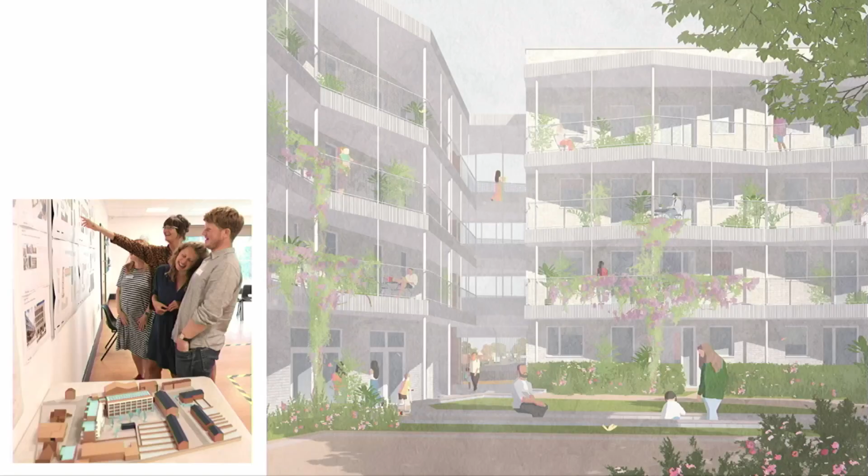We're part of a big collaborative team on a new neighbourhood in Lewes called the Phoenix, and the project Laura mentioned, this co-housing scheme in Norwich—we're just resubmitting some elevations today. I'm feeling quite emotional about this project now because it's going through a very long planning process.

Anyway, the point of showing you those pictures was that you might have noticed there's pictures of projects on all of those, but also pictures of people—the people who are our clients or those we work with or speak with.

And that's because at Archio we work really hard to lead the industry conversation on co-design and on collaboration.

Oh, look, my team have just arrived. Hi—sorry to embarrass you.

We really care about collaboration and co-design because we think that to solve really big, complex problems and make positive change, you have to understand the user experience and those issues firsthand. That's, in a sense, the essence of what we do and our approach.

Retrofit of existing housing stock is one of those really complex and vital issues. We were particularly interested to read, a couple of years ago, about the huge potential scale of retrofit in the UK's interwar housing stock—there was an article and a report by the RIBA on these topics.

We were really interested because we were already working in the Becontree estate, apparently the largest social housing estate in the world, with 29,000 homes. It covers the majority—40%—of Barking and Dagenham's households.

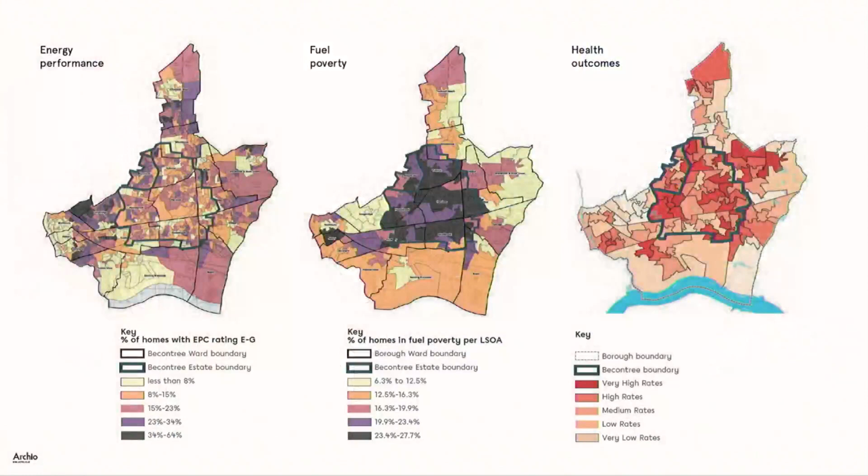It shows a correlation between low EPC rating, fuel poverty, and low health outcomes. I'm preaching to the converted here, but poor housing costs the NHS a huge amount, and damp and mould contribute to those poor health outcomes—a big issue for housing providers and housing owners.

When we started this commission to look at a retrofit strategy for this huge estate, we took a step back and thought: do we really want to bamboozle people with ideas of retrofit, heat loss, and insulation—topics we knew statistically were not familiar to them? So instead, we made 3 models of the 3 very typical house types in the estate.

So there are 14 house types, and 3 of them cover 70-ish% of all the homes. So the scale of getting a retrofit answer right and it percolating to a huge amount of homes was extraordinary.

But what we started with was talking about what's your experience of your home? Where is it overcrowded, or where do you enjoy it? Where is it damp? What's the condition of living there? So we were starting the conversation, not saying what are your heating bills and how do you want to retrofit your home? Because it's not a concept that people are necessarily thinking about every day. They're just thinking about how they experience their home.

And we also talked to the maintenance teams at length, and we found that, as predicted, common issues were damp and mold. That's because when people can't afford to heat their homes and they keep their windows closed, it's an exacerbated cycle of issues.

So I'm going to show a couple of graphs just to show you that it's not just about talking to people. There was a huge amount of technical data behind this. We have Passive House trained people in our office who undertook all this PHPP modeling.

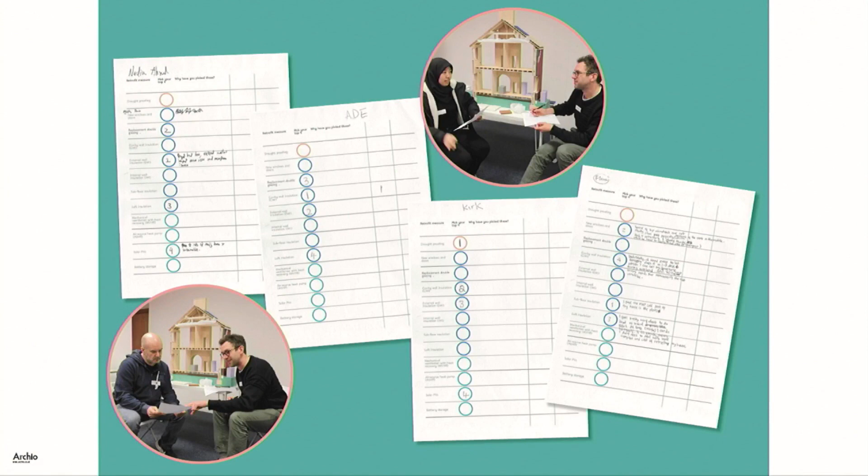And Ade, for instance, who I introduced earlier, she wants to reduce her fuel bills, but she was really obsessed with having an air source heat pump from day one. And it took us a couple of weeks to find out why, and it's because her neighbour has one. And I think that's quite telling.

I think we're kind of advocates for a groundswell of neighbourhood-led retrofit, because once you see your neighbour do something, and it's a house that's similar to yours, it's familiar - it is more likely to kick you into action than having quite general ideas on retrofit. And that's very much at the centre of what we have done here. And this is the model.

It's in the exhibition upstairs. And we wanted to make the models really beautifully so that the residents started to build trust, that we knew about their specific home, and that we had really understood what their home required.

And also it helped to talk very technically about retrofit. We have a whole series of videos describing different retrofit solutions. But even doing a slice through the house, none of the residents knew that they had air under their floorboards. No one, unless it's the kind of thing you're familiar with, would know that you could put insulation under your floorboards. It just wasn't something any of them were familiar with.

So alongside all that, we measured a number of different retrofit solutions, and the baseline energy demand of an existing home in PHPP, calibrating it with the EPC data for that house type, and we benchmarked it against all the energy usage and national average.

All I mean to say is we produced all these graphs for Be First, so they have a pure, good set of asset review information of their estate, but we absolutely did not show that to the residents because it would be totally bamboozling. So instead, we produced very simple diagrams like this that show the percentage of heat loss in different parts of your house.

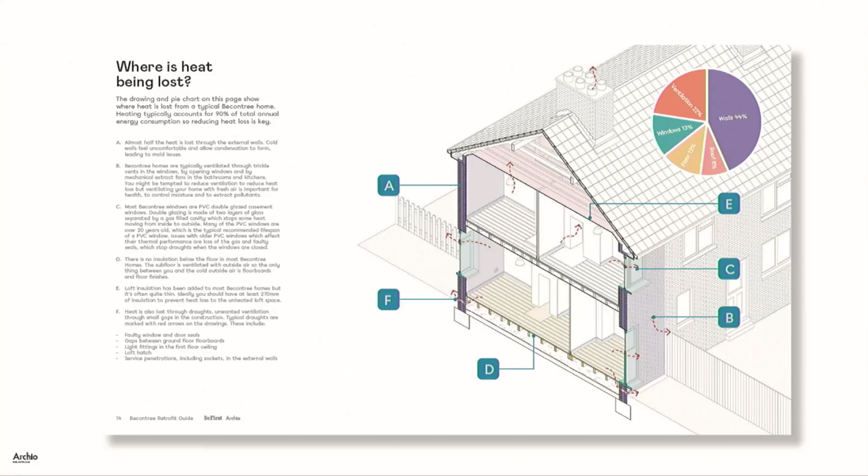And I think that really started to take them on a journey of where they could retrofit themselves. There are obviously lots of technical challenges with this because the passive house modelling assumes that residents keep their homes at a very average 20 degrees temperature, which is not the case. But we have to make our best efforts as we go.

And then topics came out, such as how do we set an appropriate energy price when we don't know what's happening with energy prices, if we're talking about payback periods, knowing that some retrofit measures have really short payback periods and some long. We did a lot of work into this, and then residents said, it's not really that we care about. We just want to know if our house is worth more if we've done the work. So in a way, they helped us define what we were measuring and targeting.

And that's now become the next piece of work - if Amandeep were here, he would tell you about it - about how we're getting more data on that so that we can fill people with confidence that it would add value to their homes. Although, frankly, that was a month ago, and now who knows.

So what we were ultimately drawing out was a pathway to a net zero home. And I think where we got to was that we needed to create a retrofit solution that enabled a net zero home, air source heat pump ready, etc. But we had to get there first with some easy wins. Nobody we met there was going to employ a retrofit coordinator and do the whole hog. We had to start with describing some easy wins and their payback and how they would be overcome.

The other thing we had one eye on is that most of the people we met were more motivated to spend money on extending their really quite small homes than on retrofitting their homes. The homes are built in the 1920s, and the kitchens are really designed for one housewife to carefully make dinner on her own. It's just not the reality of people living in their homes.

So we produced - this is a very simple drawing, but an extension and adaptation guide that is now being subsumed into Be First's design codes, planning design codes for adaptation and extension, so that we're removing another hurdle to retrofitting your home. And we're showing residents how if you do retrofit and extension at the same time, you save a percentage of the building cost of doing the two together.

And that is basically me. I don't know if I've been too short or too long, but there you go.

All I was to say is that with over 1 million homes of exactly the same interwar housing typology, I think this scale of potential impact is huge. And I also think that I've been meeting with lots of people who are working to impose retrofit on their tenants and on their neighborhoods, and they're getting a lot of refusals. They go all this way to the end of finding a solution, and lots of people don't have the trust and are not taking up this incredible offer, actually.

And so I think that understanding people's issues of trust, the hurdles towards them doing it, taking it up, is really fundamental if we're going to build this groundswell of neighborhood-led retrofit, which I think is really fundamental.

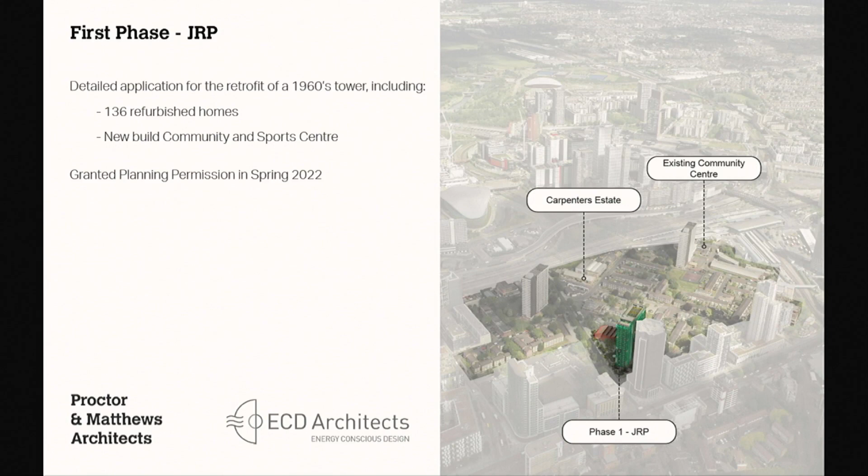So this is the first project, the first phase. This takes an existing tower within Carpenters and puts forward new refurbished homes, as well as taking an existing community centre, which is on the northern side of Carpenters over here—the Docklands facility—into a state-of-the-art community centre at the base of the building. This was granted planning permission in spring 2022, and we'll talk a little bit about that later on.

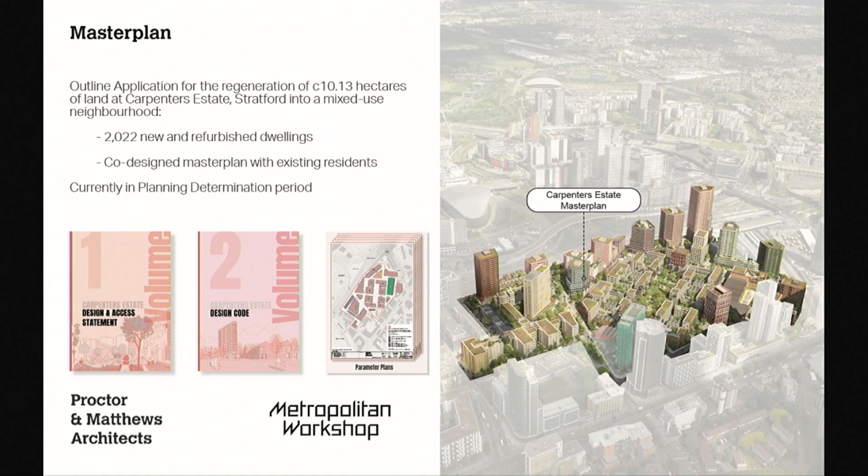And then the master plan is the wider estate regeneration, which includes up to 2,000 new and refurbished dwellings. This has been developed through a process of co-design with existing residents, and it's currently in the planning determination period. The master plan includes parameter plans setting out things like access, building massing, heights, landscape arrangements and land use, accompanied by a design code, and then a design and access statement which has an illustrative master plan accompanied with it.

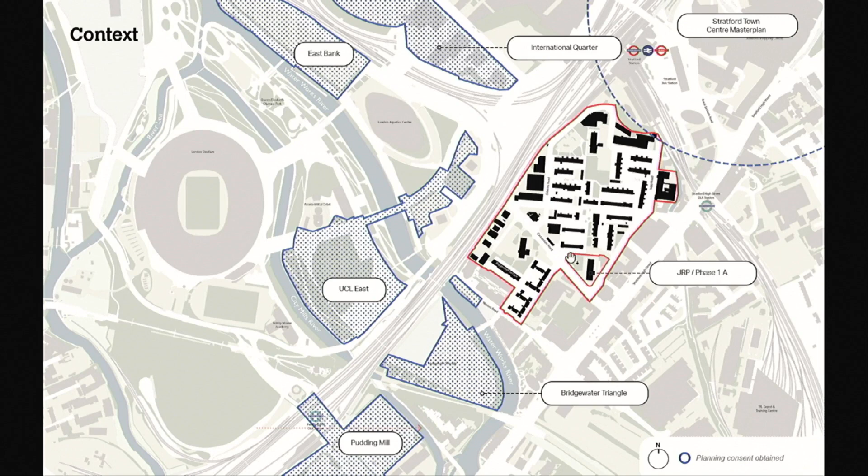So the context is really interesting. It's right next to the Olympic Park and all the amazing developments happening within the area. There's a new Stratford train station entrance going into the northern side of Carpenters Estate, which is going to completely change the way people use and visit the estate—particularly how people get to the new developments happening within the south of Carpenters. You can see JRP nestled within the centre here.

There's a series of workplaces and business units that occupy the western side of the site, adjacent to the railway. The Carpenters Dockland Centre, which is the community centre I talked about earlier, going at the base of the first phase, a building crafts college, and also a school as well. So really it's got everything alongside.

Also, have I just lost the mic? No.

I'll keep on going. Hopefully you can.

So really, with that mix of uses, it's got absolutely everything that makes it a kind of 15-minute neighbourhood. So it's a really key piece of cityscape.

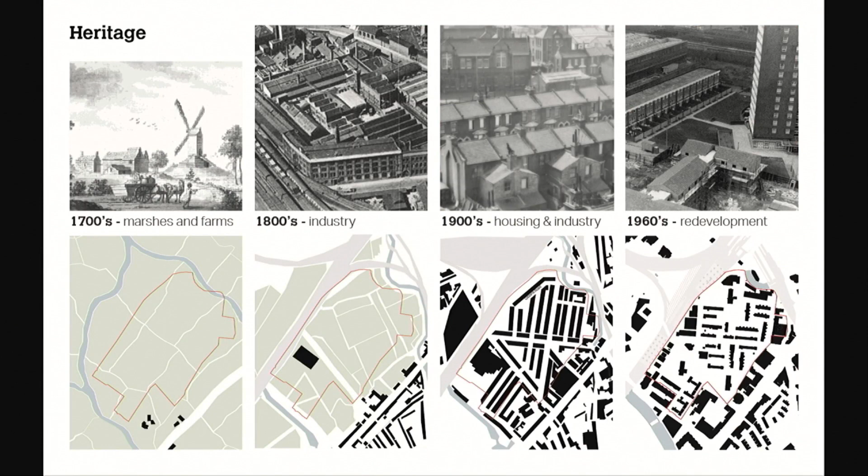It's got a really interesting heritage from being marshland back in the 1700s, going through a period of industry in the 1800s, to then a mix of industry and housing in the 1900s, which became quite overpolluted, and led to the estate redevelopment in the 1960s. This has been used to inform the development of the master plan going forward, particularly the way we've thought about the movement strategy.

What's really interesting about Carpenters is the sense of community that's been on the estate all this time. Through this process of the master plan, we've worked with residents to understand what works with their estate. It's been really interesting talking to people, going through history archiving and things like that. We've met people that have lived on the estate for a very long time, who actually remember the estate before the 1960s redevelopment.

They remember how this new estate came along and really transformed their lives, so people could live within state-of-the-art apartments, within new parkland and areas of amenity. So this made a real community, which has slowly been lost over the years.

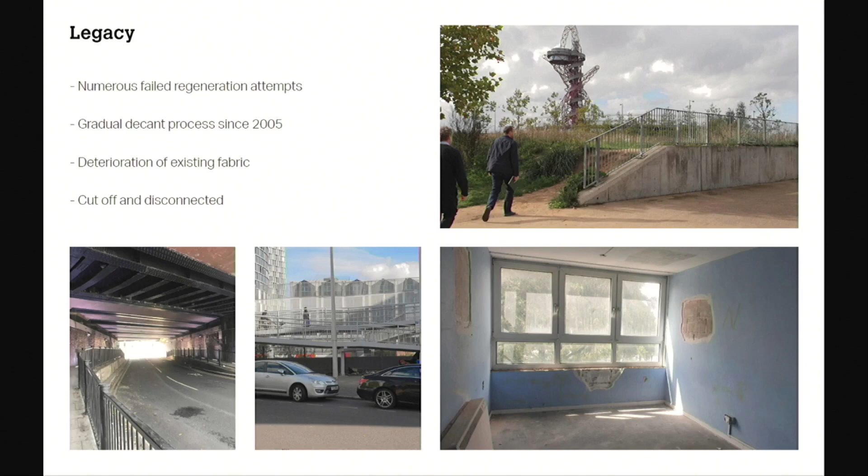Since 2000, there have been a number of development attempts, which looked at completely clearing the estate with the existing infrastructure and replacing it with new uses and new residents. Although none of these development attempts succeeded, there's been a gradual process of decant since 2005, which has led to the deterioration of the existing fabric.

And so, while the estate is so close to the Olympic Park and that legacy, none of that has been given onto Carpenters, so it's been quite cut off and disconnected.

But in 2018, a new direction was established, one which very much put residents first to inform the future of their estate. So in 2019, we started this process of engaging the residents, which led to a resident brief. Part of this process looked at various different levels of intervention.

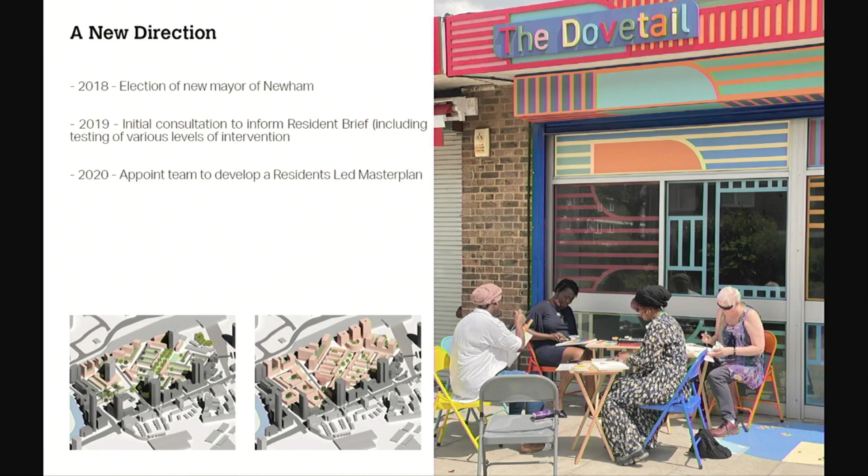The images on the bottom left are conversations, or drawings, that we used with the residents to discuss what sort of intervention they wanted on the estate, whether it was a low-rise solution or more of a mid-rise solution, which could actually provide more amenity space, more uses, more grassland, more parkland, and all that sort of thing.

So this led to the resident brief, and then from 2020 the master plan team was appointed, which led to the project that we've been working on over the last few years.

We've done a lot of our engagement from the Dovetail, which is an on-site engagement hub. This has really set the creative engagement process, using model making, interactive workshops, gathering ideas, gaining consensus, and understanding the parameters of the estate. It's been a very gradual process over time, but eventually we've gained trust with the residents.

In 2021, residents voted in favour of the ballot, which gave us the consensus to develop the master plan, and we submitted that in the summer of last year.

So in contrast to all the other developments that came before this work, we really wanted to work with what's there. This goes back to the historic maps we talked about before, looking at the legacy of movement, looking at those historic routes, and overlapping and interweaving the new movement patterns that would come as a result of the station on the northern side of Carpenters.

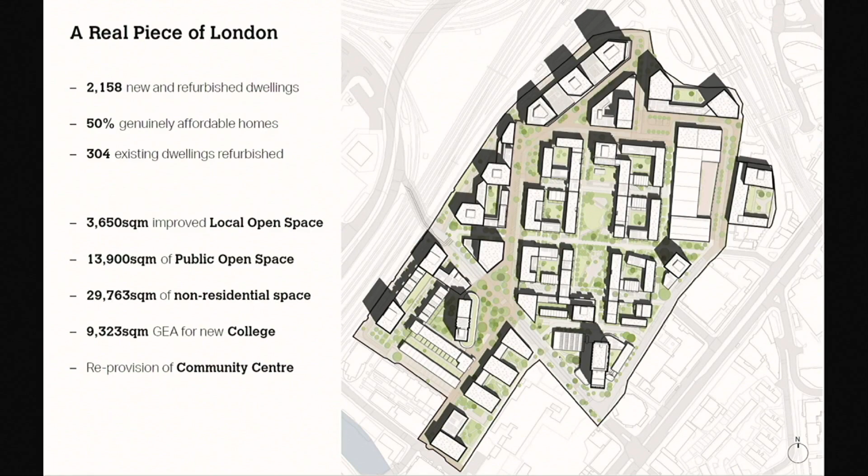And then also thinking about the existing green spaces, so expanding the existing public spaces at the centre of the scheme and thinking about how we can keep the biodiversity, keep those spaces so it gives a memory of place. And so what we've really tried to work hard to achieve is this real piece of London. In total we've got around 2,200 new and refurbished homes, of which 50% are genuinely affordable. 304 of those are existing dwellings that have been refurbished. And then alongside that, it's got all the local open space requirements, public open space, and the mix of non-residential employment, education, and community spaces that bring together that real piece of London.

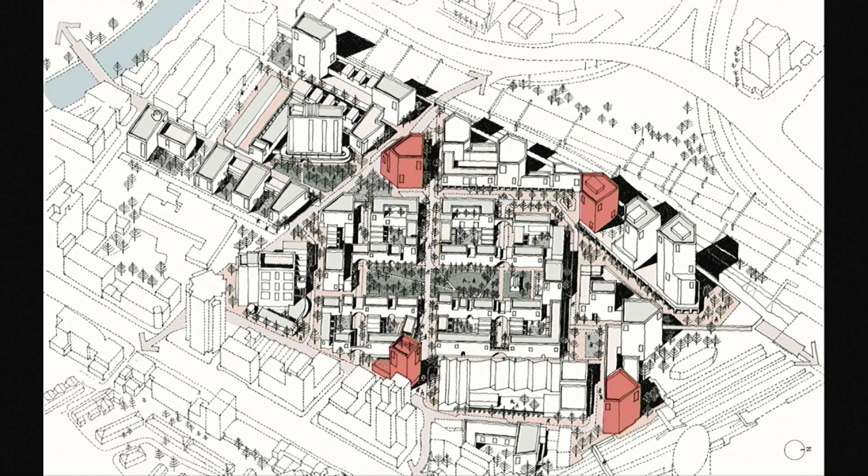And this diagram starts to pick up on those key movement routes as well. So that key route from the new Stratford train station entrance through the estate along a mixed-use high street, taking people down to the south and back over towards the Olympic Park as well.

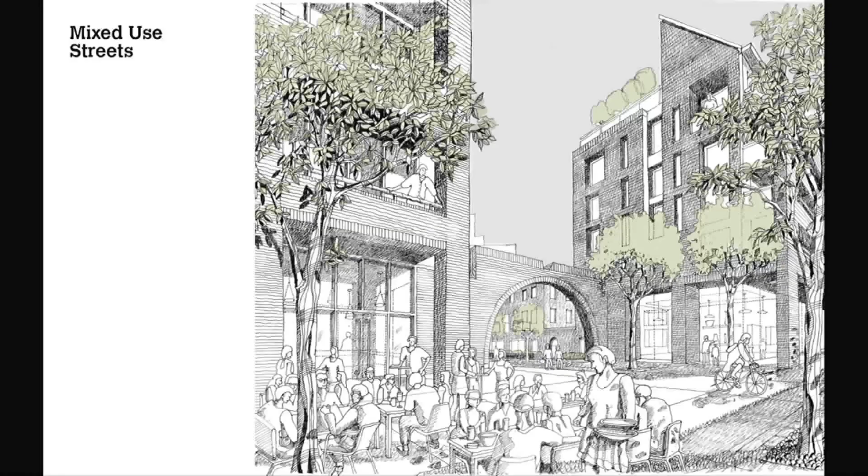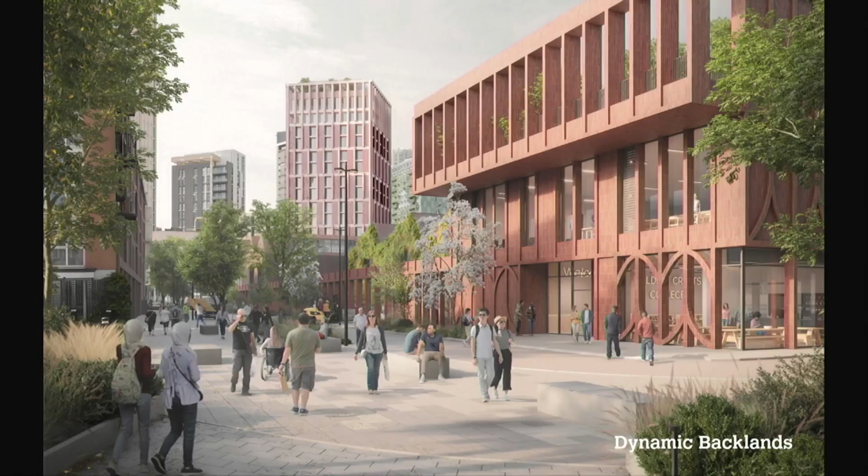We have mixed-use streets, so bringing all those other uses that we talked about in Carpenters before, and making sure that they're rehabilitated in new settings along with the high street. We've got dynamic backlands, so going back to all the creativity and making that Carpenters is, that reflects the heritage of Carpenters, and putting them in new structures that you can see the activity and the interest that happen within these new facilities.

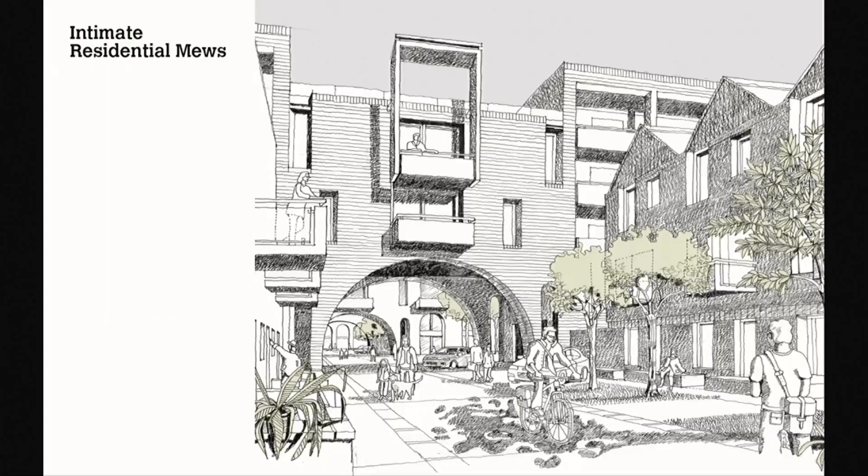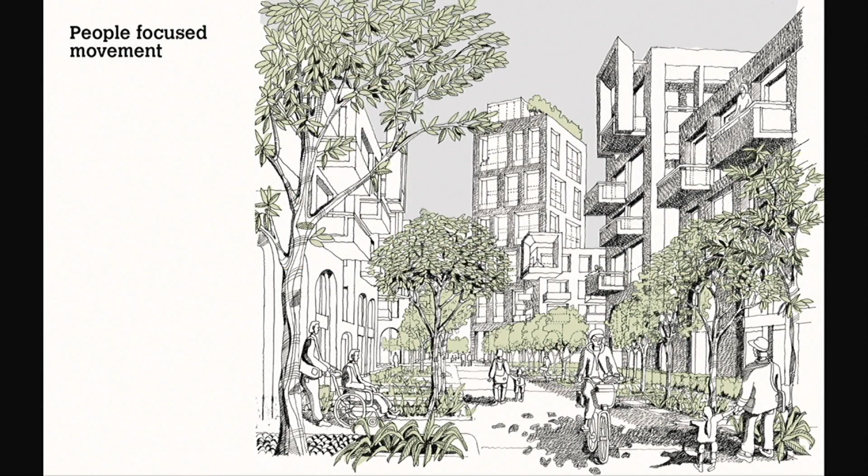We've got intimate residential mews where there's family housing, and then more active urban squares, again with commercial and community uses spilling out and occupying the space. And then a people-focused movement strategy, really working with those historic routes and spaces and thinking about how we can create a people-focused environment that promotes cycling and walking.

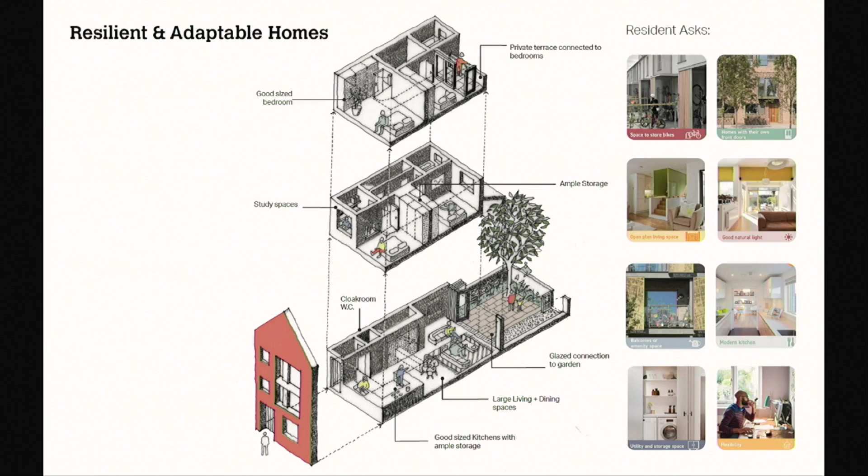So we've got things like delivery hubs that are located in certain locations, so it limits site traffic around the estate. And also thinking about how we have resilient and adaptable homes, and picking up on some of the key things that residents have asked for, such as being able to identify your own front door and the storage facilities that we've got as well, and flexible living arrangements to suit study spaces and things like that.

And how this all comes together over a period of time. So starting with the underused sites, such as phase 1, which is the existing building, and phase 2, which again encompasses an existing building, and how this then frees up other parts of the development area for higher density housing to suit a range of different needs.

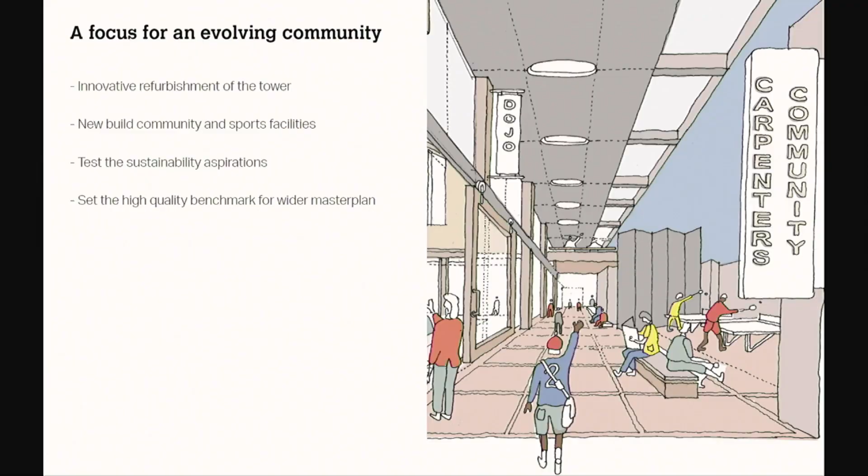That's a whistle-stop tour of the estate. I'd like to talk about the first phase, which is the existing building retrofit. This effectively becomes a focus for an evolving community, providing community facilities that will kickstart the Carpenters community while also delivering early housing. It sets a benchmark for the wider master plan to unfold, establishing that high quality aspiration. The idea of doing it as a planning application ahead of the master plan is so it can come forward and we can start on site as soon as possible.

The existing tower is a 1960s 23-storey tower. As I said before, it's built in the style of Corbusier, but it doesn't have any of the modelling or interest of its unité inspiration. It's raised off the ground on giant concrete pilotis, but the result is quite blank and underwhelming frontages that surround the streets.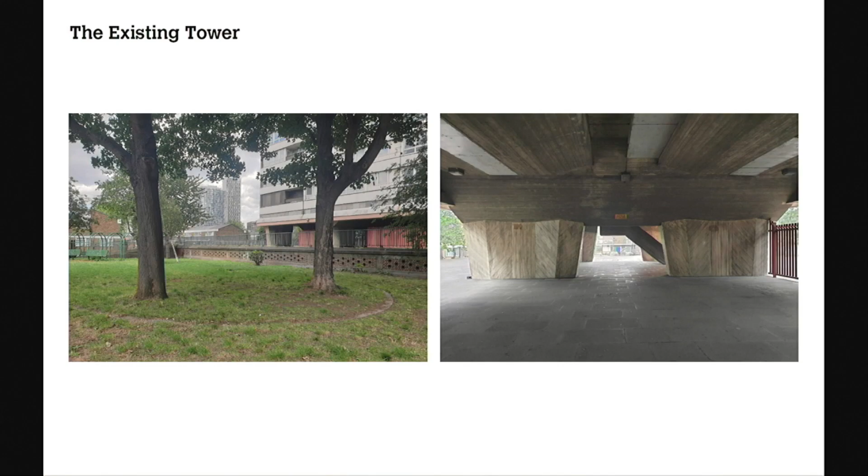As I said, it sits within its own parkland, and we've got some Category A trees that we're retaining as part of the proposals. These are some photos showing the building sitting within this green parkland, which is very underused and underwhelming. This is one of the photos from the undercroft, showing that amazing concrete soffit with the pilotis coming down. That's the entrance into the building, and it's quite oppressive and not particularly welcoming - it could really be improved and rethought through.

There are a number of reasons why we looked at keeping this building. Firstly, the environmental benefits - ECD architects would explain this better than I can, but effectively by keeping this building it allows a 75% reduction in embodied carbon over a new build, so there are lots of environmental benefits there. We can also improve the thermal performance by taking it up to passive house standards, adding new insulation onto the facade, and there are new and enhanced biodiversity benefits we can achieve as part of the proposals.

There's also a social significance here, which comes from speaking to residents around the estate and understanding their fondness for these towers from when they were first built. One of the key design ambitions for taking this project forward is to treat the building as a heritage asset so that it reflects the values of 20th century modernism. This is something we spoke to residents about through archiving sessions, where we talked about the aspirations of these buildings - they had active groundscape, interesting modelling, and you could see your house from the ground. That was one of the key things that drove the design forward.

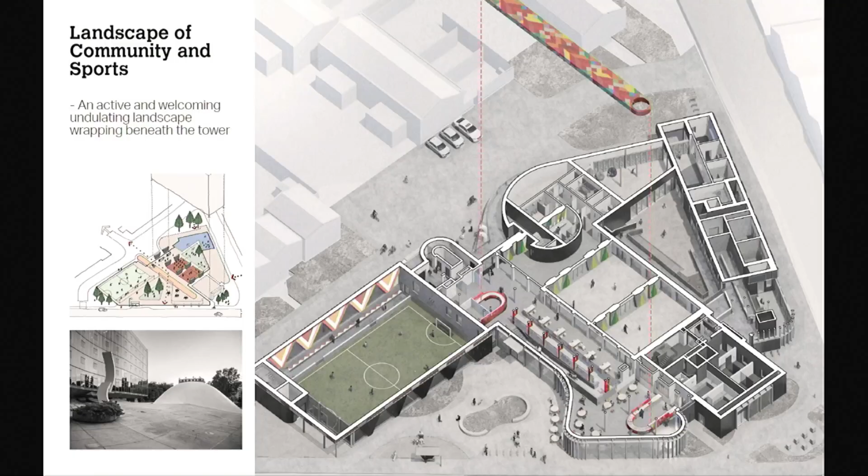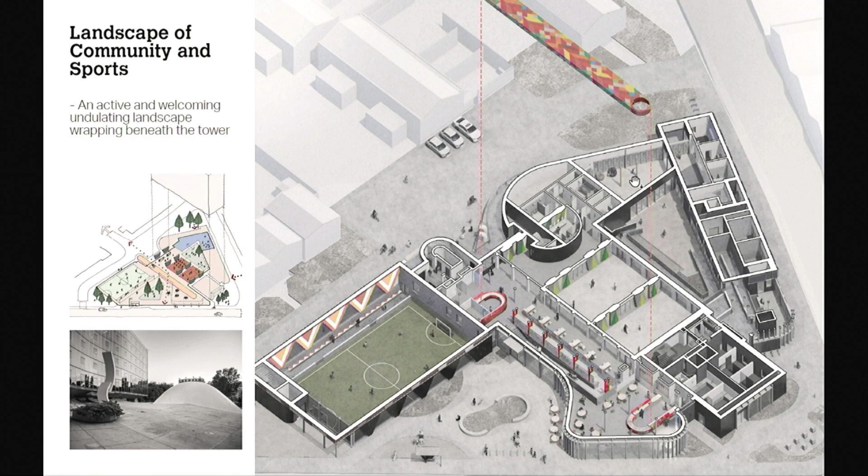So what we came up with is this landscape of community and sports spaces, giving us an undulating floor plate with a series of community spaces while still allowing transparency through the building. Putting all these new community spaces at the ground really activates the surrounding streetscape. You've got a sunken futsal pitch which people can look down into from the surrounding square, a cafe that spills out onto the street, ramps and circulation taking people up to the upper ground floor level using the undercroft of the existing building for flexible studio spaces, and a courtyard space on the other side providing a sheltered enclosure for an after-school club. So there are lots of different facilities that make this ground floor really interesting and active.

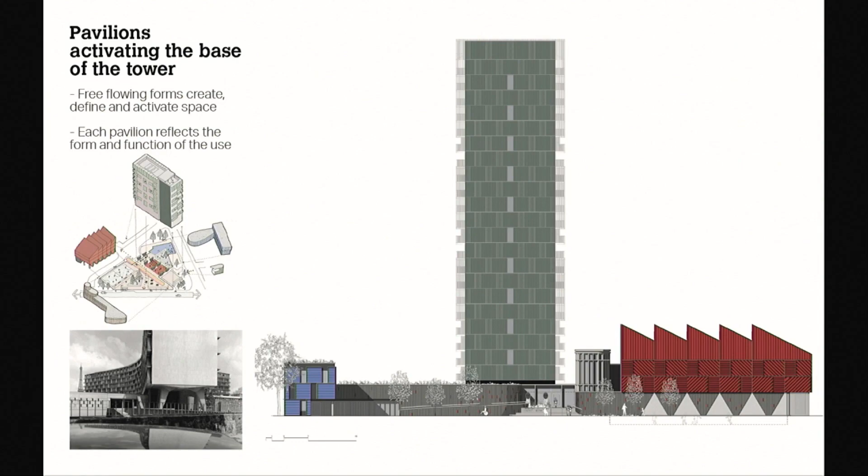This idea translates into the third dimension as well. What we have here is a series of pavilions that sit at the base of the tower, and each one has a slightly different form and shape that reflects the form and function of its use - again relating back to that idea of 20th century modernism. Each one is coloured in a way that identifies the different programmes of the building: red for sports and community uses, green for residential, and blue for after-school club and office uses.

All this leads to a contextual but vibrant colour palette, reflecting the diversity and colour within Carpenters. This draws inspiration from the Bow Porcelain Factory, an 18th century factory that used to occupy, or was nearby, the Carpenters estate. We're also thinking about using ceramics, partly as a link back to that Bow Porcelain pottery, but also because ceramics have a more domestic and human quality than other materials like metals. Again using colour to identify - this picks up on some of those Bow Porcelain fragments, using reds, blues and greens that relate back to the contextual Bow Porcelain.

In terms of the tower, there's a simple framing of balconies that goes up the facade, giving it a new proportion, depth and modelling. The idea of framing these balconies goes back to one of the points we talked about with residents before, about being able to identify your home - so by sitting within the surrounding landscape and looking up, you can see your home that's framed and given a new expression.

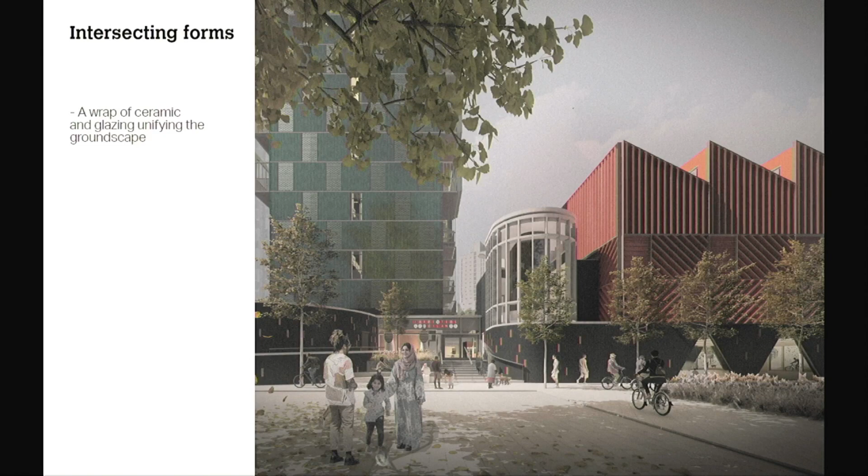There's a series of intersecting forms - a wrap of dark grey ceramic that folds into glazing and then into transparent areas, so you can see the activities that happen beyond into the community centre. The different forms of the sports hall and circulation towers all help break down what's quite a large programme of activities into a smaller scale, more readable composition.

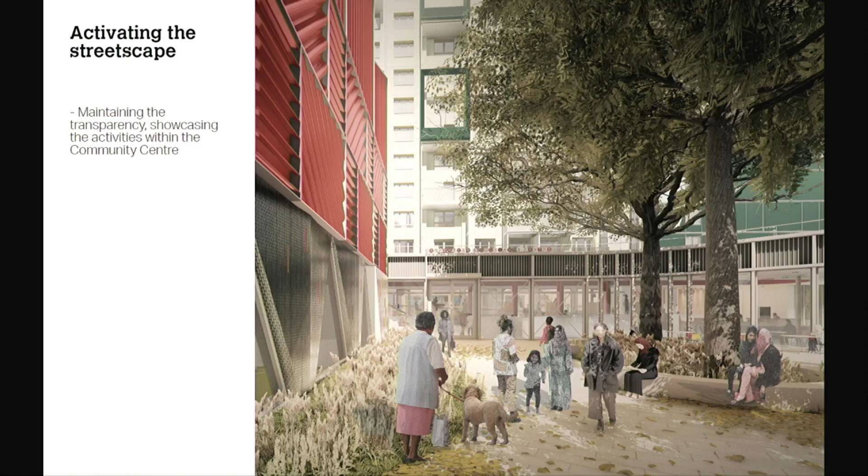It's all very transparent, so we're maintaining that transparency so you can see through the activities that happen within the community centre into the external spaces.

I suppose it demonstrates how there are lots of these typologies all across London, many with similarities where there's blank undercrofts and not a particularly engaging way of sitting within the landscape. So these new community pavilions can really help activate and engage the surrounding streets. So I think that's it, and we'll leave questions to later.

Hi, I'm Linda Thiel with White Architecture. Gareth at Civic Engineers, so we'll double up, see if we can make this work. You can have the lecture and I'll just stay here.

We've worked together since 2018 on the Gascoigne estate for Be First, and given all of our experience during those 5 years, we had a conversation this time last summer. Currently we've delivered 1,200 new build homes across the estate. We really need to assess what the later phases are going to be. There have been various conversations with design teams and Be First about what to do with the rest of the West, how do we progress on all these different sites. So we basically decided we're going to do this on our own - it's not commissioned by Be First, it's more our research, almost presented as a provocation to them, saying why don't you think about it this way for your final phases.

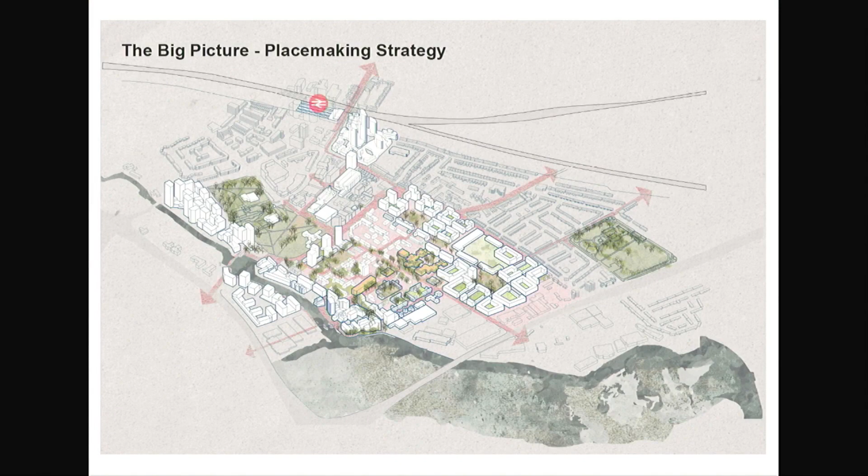We're in Barking on Gascoigne Estate. Barking station is up here. This is Gascoigne East, this is Gascoigne West - very similar to Carpenters, used to be terraced houses, very poor, so that was all demolished in the 60s, and it became a nice new 60s estate.

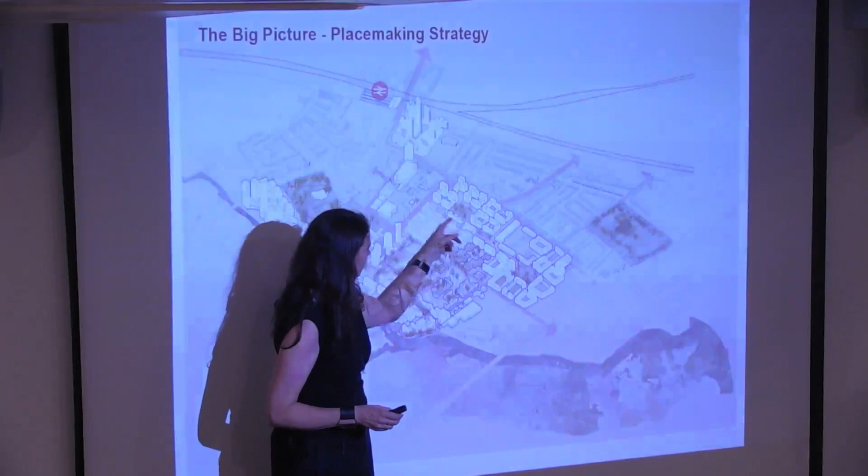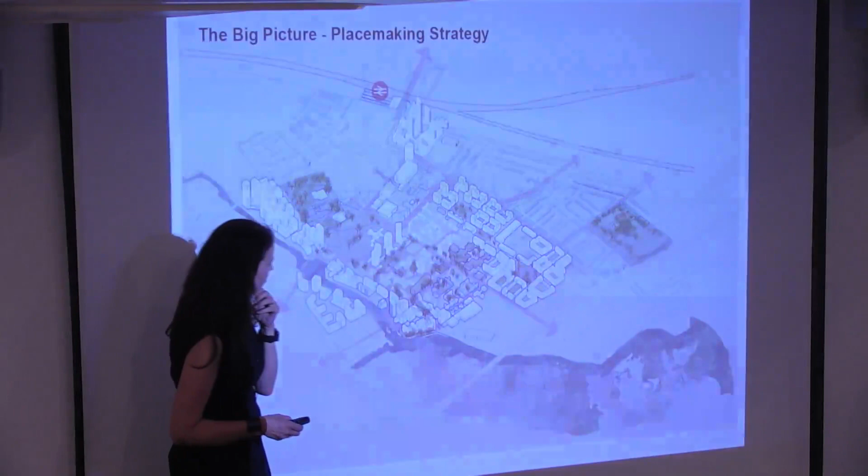The first phase we worked on together was Gascoigne East Phase 2. East Phase 1 had already been delivered by Levitt Bernstein for L&Q, I think, before Be First was established. This is about 550 units. Henley Halebrown have been involved, and Fisher Cheng has been involved with the community centre as well. Then we were commissioned to do - trying to figure out where we are - West Phase 1, which is down here, which was 3 existing low-rise, 3-story buildings with around 50 homes, and we delivered 200 homes on that site.

During that time, the Be First team realized we need to have an overall strategy for what happens on this estate. We've got 3 major schools - we've got Greatfields School, secondary, and we've got 2 primary schools here.

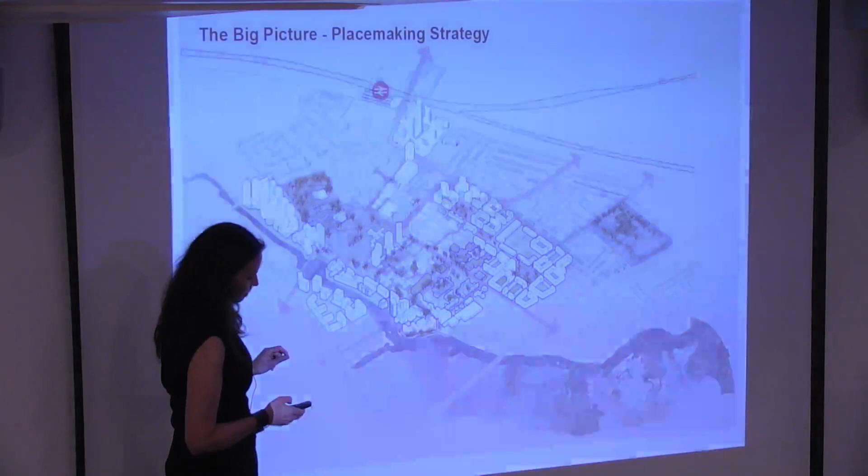Lots of pupils and families moving across this estate daily, and with all the construction sites going on, it was also very poorly connected east to west. So we tried to really work with the placemaking strategy, finding easy wins in terms of legibility, wayfinding, safer streets, pedestrian-focused and cyclist-focused. During this time, we had in-depth conversations with many community groups and residents, trying to understand their life on the estate.

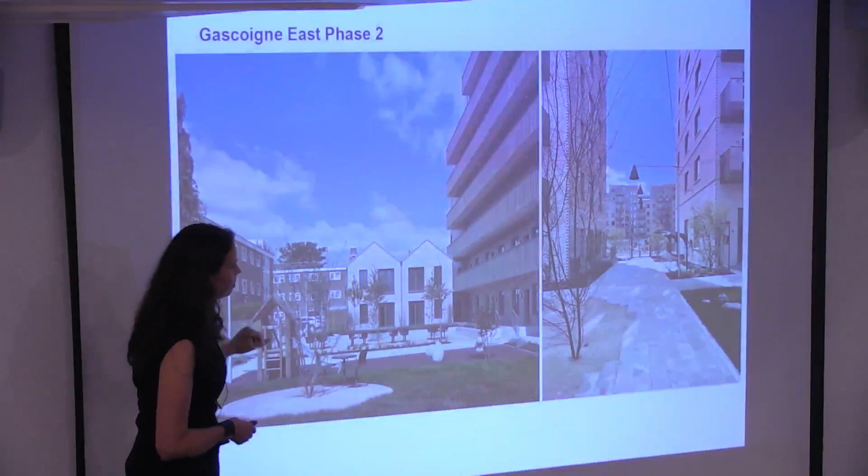This is East Phase 2, so here you do see how the new buildings actually relate to some of the 3-story existing buildings. This is part of the bit which is not yet master planned and might actually stay like this - that's a courtyard image from East Phase 2. And this is West Phase 1, which also relates to the 3-story houses and apartment blocks.

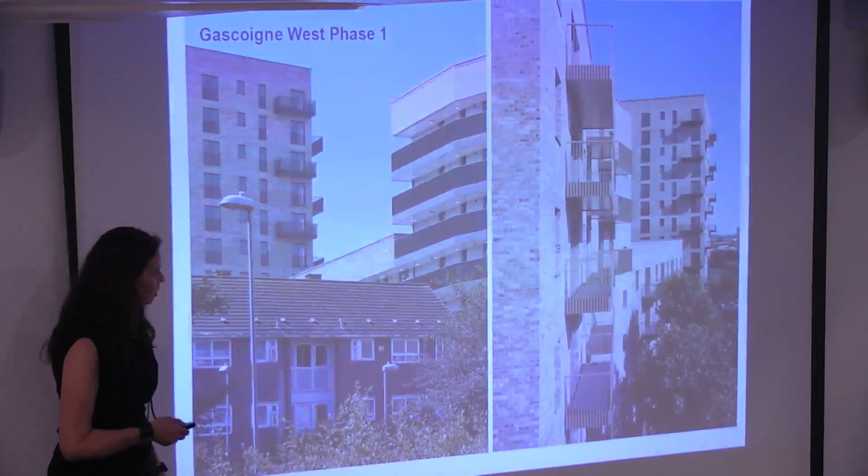Based on that, we said, why don't we benchmark against the 2017 master plan, which I think is the HTA Pitman Tozer Stitch one, which has since been progressed and developed. But just to get something to compare - if we do a full-on retrofit approach, how does that compare in terms of carbon against a full new build scheme, comparing the same unit numbers and a different approach?

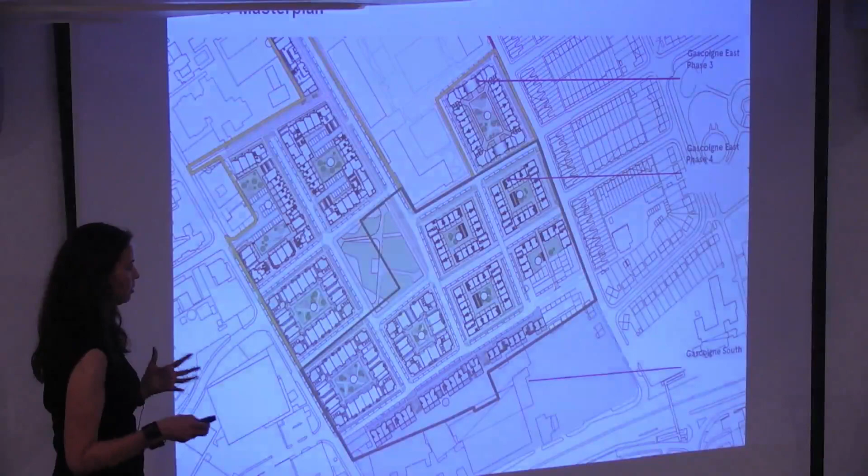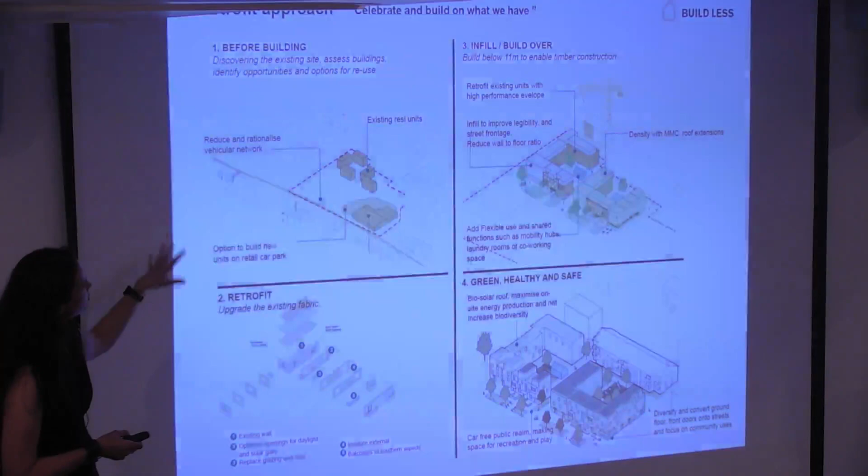Jump in if I'm dwelling too much on stuff. Keep going. So basically, setting out these four steps: before you start to do anything, assess what you have. Can anything be used? How does that affect the community? Talk to the neighbors and everyone who's involved, and do a really deep analysis of the building structure that you have. Gareth, you've done extensive carbon calculations and assessment of the buildings.

That's right, we'll come on to some of those more detailed calculations in a moment. But one of the key conversations which Linda and I were having was not just about the buildings and the embodied carbon contained within those existing buildings, but also within the fabric of the streets, the utilities, the drainage, and all those things in the original street pattern - how much work and carbon goes into placing all of that stuff. With a lot of estate regeneration, especially when we're knocking down buildings and rebuilding them with new plans, all of that gets scrapped and has to start again.

So what we decided to do is ask: could we create an estate by retrofitting the existing buildings and then putting new buildings in amongst them, while still delivering all the excellent placemaking aspects you need within a regenerated estate, and also utilising some of the street pattern which already has that infrastructure?

So basically, looking at what we can do - how can we add on, what can we extend. This started a year ago, which meant we were looking at infill and 3 additional stories in timber, which has since been scrapped by the GLA - they don't fund anything in timber. So a bit of a rethink when that happened, and then really looking to do a neighbourhood retrofit approach rather than just a building retrofit approach.

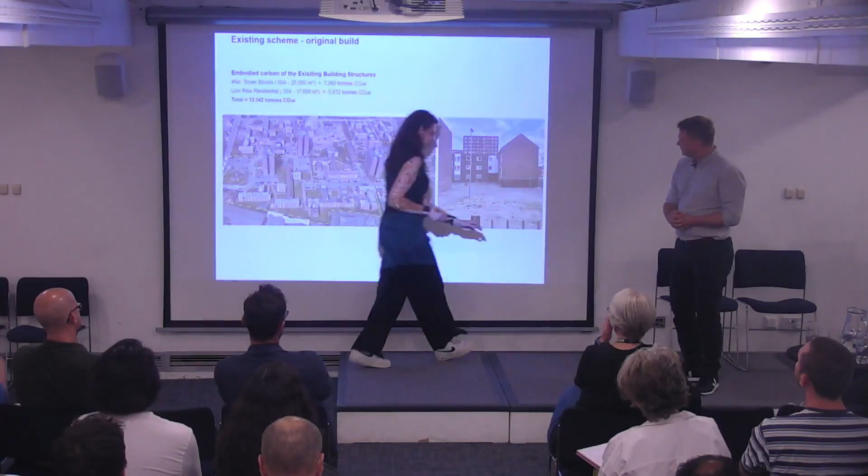So here are some of the typical buildings - I'll click through, but I appreciate some people are looking at that screen as well. There are typically two building types here. There were 4 tower blocks, I think 12 stories each, on the southern side of the site, and a whole series of 3/4 story low-rise apartment blocks with interesting footprints - they're linear, with various arms and legs going out. That's obviously complicated when you're trying to achieve courtyards and street patterns and things like that.

This is the southern part of the estate, the last piece - this was where we got together. It was at a sustainability conference, some of you may have been to Footprint Plus this year. We were having dinner one evening and said, look, we've just got to have a re-look at this because it's not the right thing to do to keep knocking down these buildings. Let's be provocative - let's actually say, let's retrofit these. So the starting point was: right, let's start looking at the embodied carbon - what embodied carbon exists within the existing buildings?

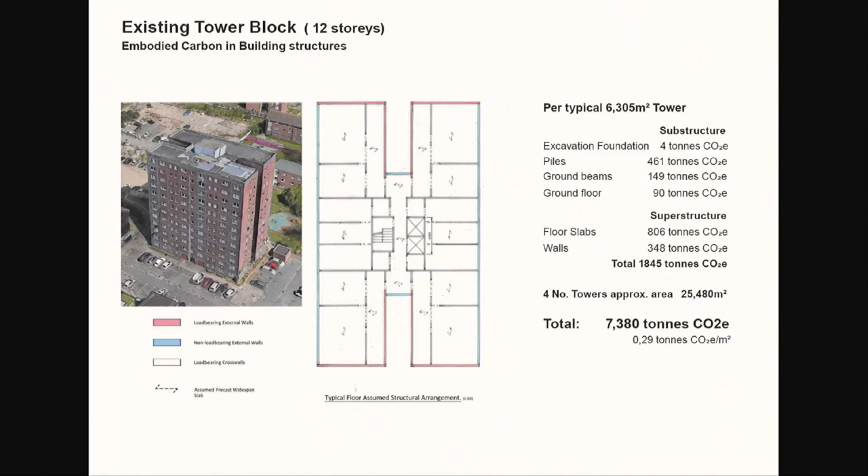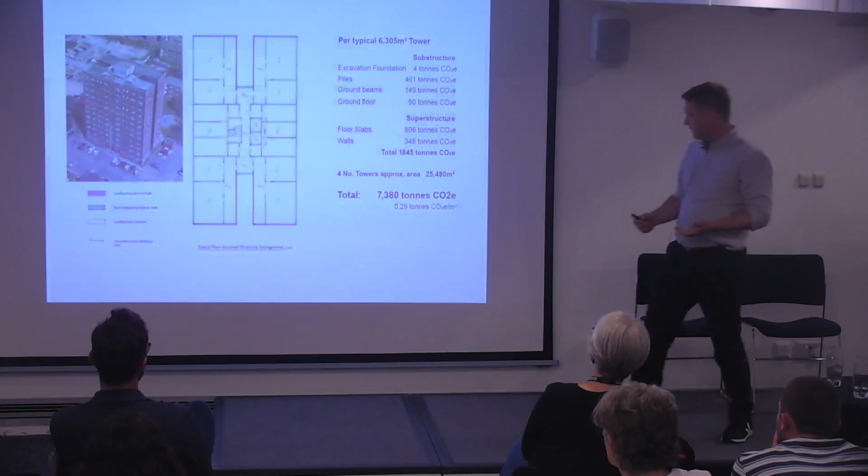So a typical tower block on the estate, from our experience of some of the previous stages, there was more of these, which unfortunately have been demolished, or fortunately, depending on how you look at it. So we knew from the analysis of these how they could be taken apart, what the structures were. And what was quite interesting about this was that the facades, the long facades on both sides, weren't load-bearing.

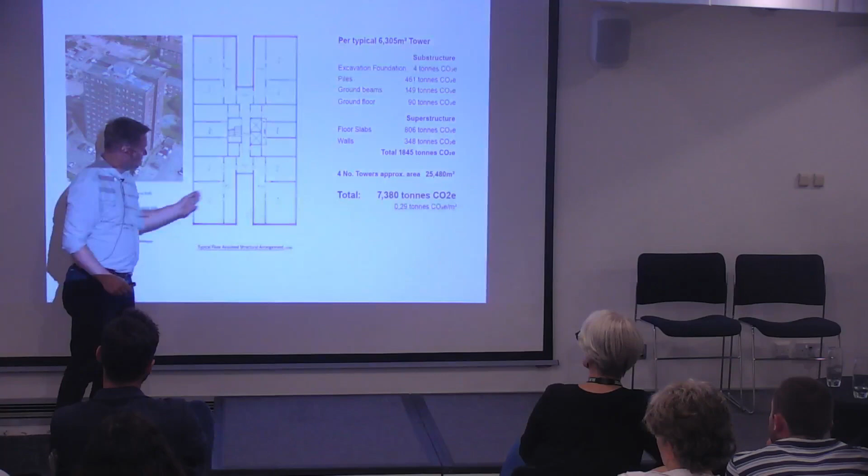Linda will come on to that a little bit more in a minute.

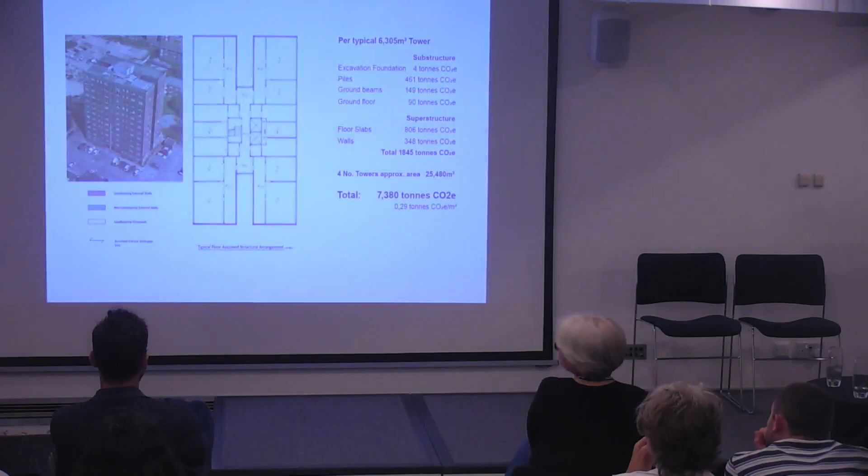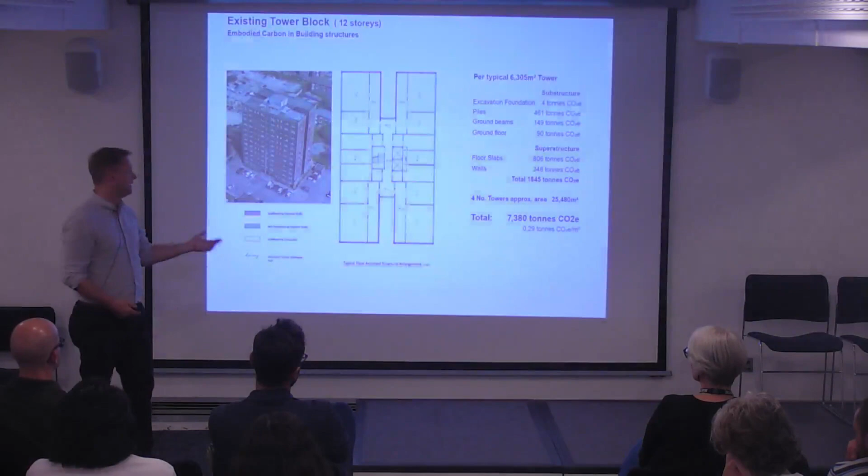So what we did is we had a look just at the structure to look at how many tons of carbon were included within these existing buildings, because we felt that was a really important story to tell when you're trying to convince someone you've got to save something, because actually how much carbon exists in your current estate, because actually you own that and that's yours. It doesn't matter what your new building is and how low you try and keep the new building, you already own this too, right?

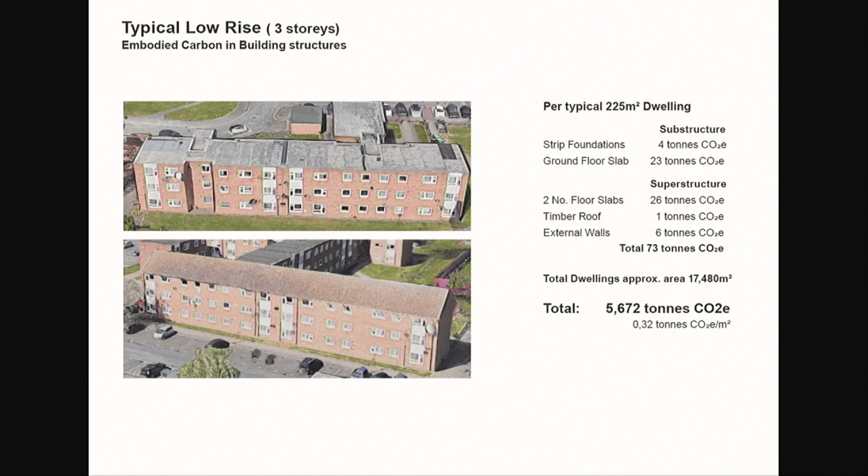So this is the typical low-rise buildings here, which typically had ground floor slabs, timber floors, or timber roofs and concrete floors. And we estimated how much carbon was in these buildings across all these different types of them, including in between the tower blocks.

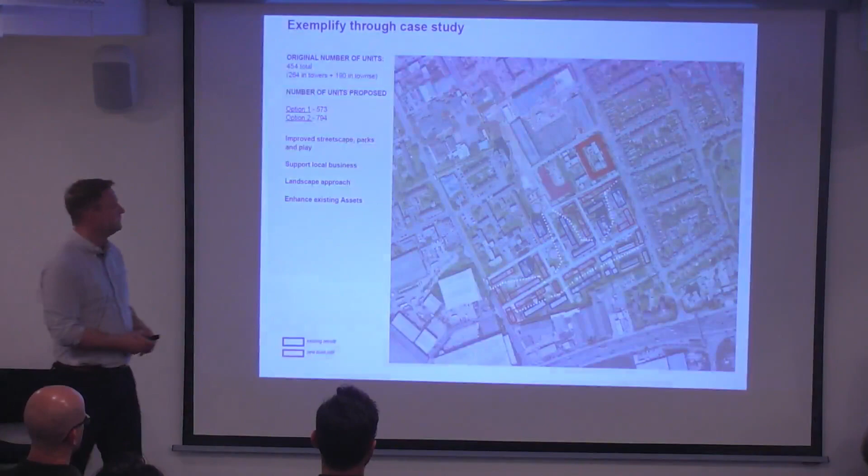I'll pass back to you, Linda. I'll stand here and you can point over there as well. You've got the clicker, tell me when to move on. I mean, appreciate our graphics aren't as they would be if it's been commissioned. This has been done on weekends and evenings.

But this is trying to show basically our red line boundary. We're testing two options. As you might have seen before, the 2017 master plan was just under 600 homes, so that was our starting point. Midway through, we presented this to Be First, and they said it looks good, but they're actually now assessing an appraisal for 800 homes within this red line boundary, which is very dense, as you can imagine.

But we started to look at the existing street pattern, what streets we can keep. Everything here that's blue is retained, and these red linear blocks are new builds. We tried to shape some kind of courtyards, figuring out where that can fit, what distances you'd get between your buildings. This also highlighted that we decided to suggest demolishing some of these arms and legs of the three-story houses. For the 575-ish option, we suggested only a new build which was under 18 meters, so leaving the towers as they are, but we didn't add any taller buildings.

As you'll see later on, when we brought it up to the 800 homes, we obviously had to push the heights on some of the blocks.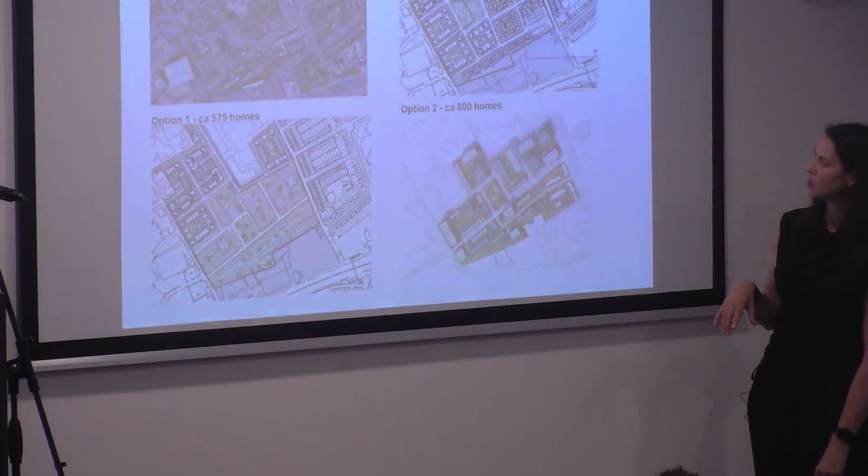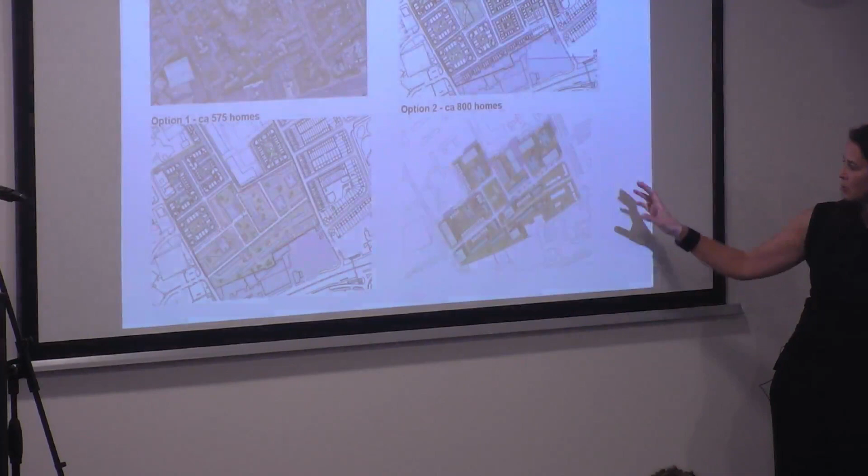So this is just a quick comparison between the existing fabric, the 2017 master plan, roughly 575 homes with the new build red blocks, low rise, and then option 2 with 800 homes, which as you'll see is more fatter blocks in combination with three-story houses. Both of these build on the similar street pattern, because we thought that was really important to show that it can actually be possible to keep that infrastructure whilst creating a good neighborhood with these green streets, parks and courtyards.

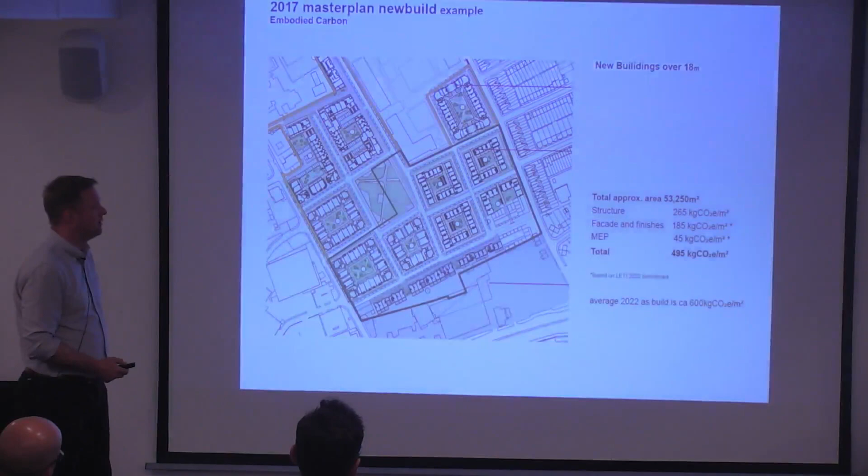So the next thing was beginning to look at what the carbon would be associated with the whole new build development, and working towards the sort of embodied carbon targets we'd be working with LETI on at the moment. I think for Gascoigne East we were up at around 635 kgs per metre squared. Obviously we're all trying a lot harder now to get that down lower, so we put together some figures on the basis we thought by the time this got built, hopefully we'd be getting to around the 500 mark. This then began to give us some comparisons of what a new build scheme like this would be compared to a retrofit.

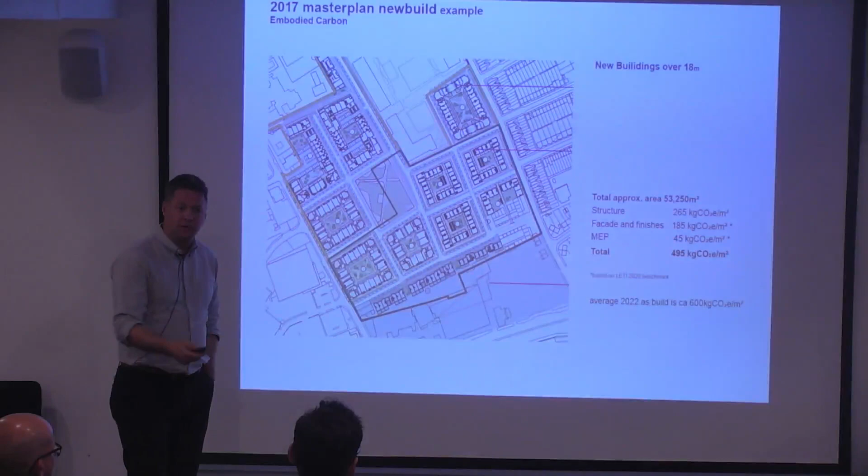So how do we retrofit? It was really interesting to see the tower retrofit which you've done. I'm going to ask you tons of questions afterwards, because one of the key facets about retrofitting these homes is actually making them better places than what they were currently built as, and trying to meet London plan standards for space and external space.

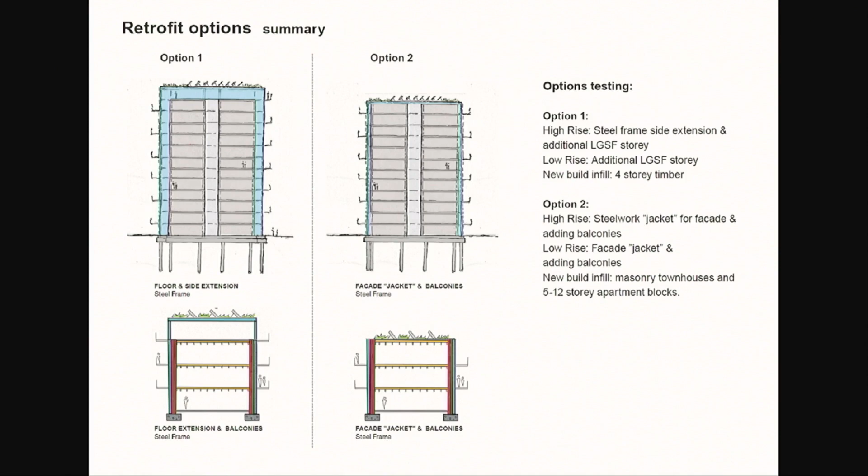What was really good about these buildings is the external walls on the long plan actually weren't load-bearing. So that gave us an opportunity to take a whole load off the building from the foundations, allowing us to do some load balancing by adding new lightweight structure in and around the building to provide additional space, potentially making the flats bigger where they need to be, and also creating spaces for balconies. Doing this enables you to completely encapsulate the building and provide it with a new facade, which is far more thermally efficient as well. So it achieves that too.

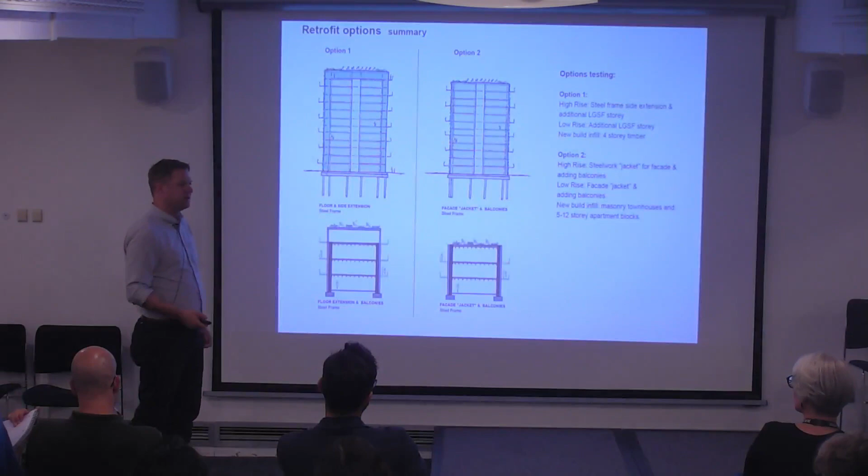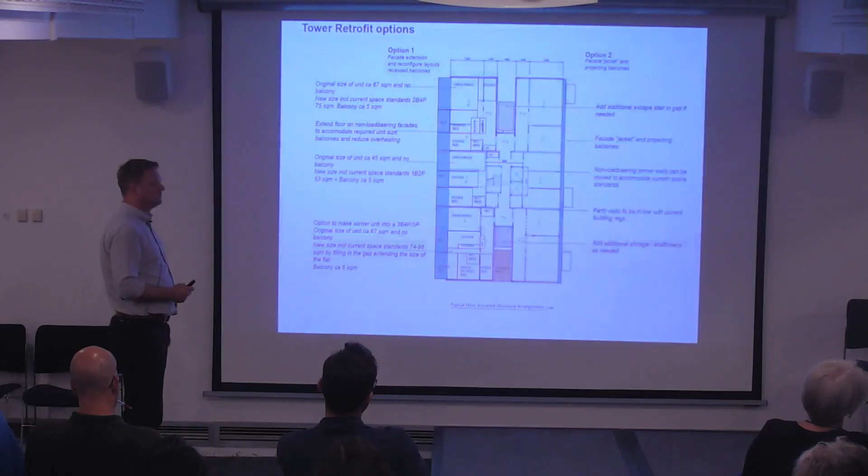There's a couple of options we looked at on both the low rise and the upper, whether we added an additional story as part of that to provide some additional accommodation, or whether we just went for a simple frame approach, which would just allow for adding some external balcony space. Here are the two options sketched out pretty basically through section. I think that's important in terms of the structural integrity of the building, the piling, and what it's actually calculated to take in terms of loads. And stripping off the external facades that aren't structural, replacing them with a really well-insulated option, allows it to add more balconies and other things.

Another really interesting conversation we had during this year, and also when we did roundtables with various local authorities and other housing associations, was how do you compare a retrofitted home to a new build home, especially on a site where you're going to provide both?

Like Gareth mentioned, this H shape is really good because we could add a second stair - that's the first thing to do. There are 12 stories, but we added the second stair. Then we took on the extension version where we actually tried to assess and bring all the different rooms up to current space standards. So the width of these rooms isn't to current space standards, they're slightly smaller, although the flats are quite big.

They don't have any balconies, so that's an easy win. But also, how do we then bring in our really big bathrooms? Potentially, if we strip off the facade, can we slot them in as pods? And how would that fit within this? So we're looking at how much do we need to do to actually make it work when you compare it to a new build home, or is this the relevant and really good way to make it work, especially since we can work with the facades if we strip them off?

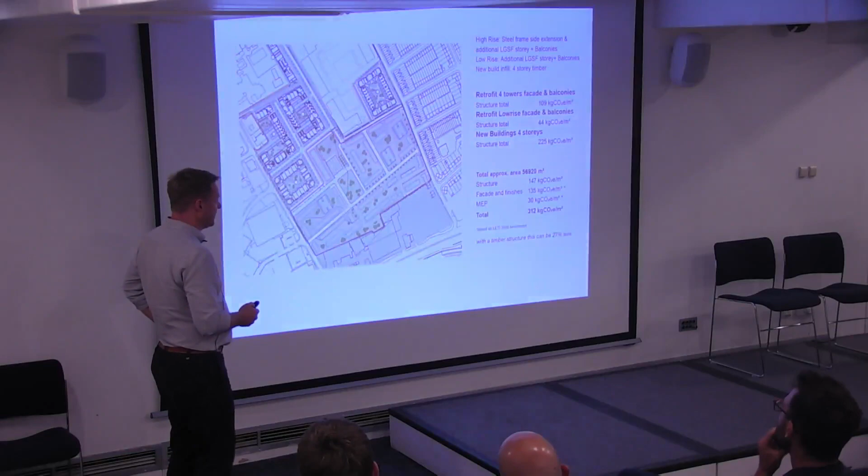And then when you add on the facade, finishes, MEP and so on, the retrofit approach we felt was hopefully coming out around 300 kg, which is obviously a lot less than the 600 we're currently doing for new build, or the 500 aspiration. If we were allowed to build out of timber, we think we could get that even less, but at the moment that's more of a problem. It was quite interesting when we were doing all the internal carbon calculations - you guys did the structure.

Sometimes it's extremely difficult to get all the data from the providers, like Sapphire Balconies. I'm going to point out, how much carbon do we have in one balcony? They couldn't even answer the question. So there's a long way to go to agree on how we calculate carbon and what tools we use to actually know if we're comparing the same data, like compared to the data Harrison showed. I think that's something we as an industry really need to work hard on.

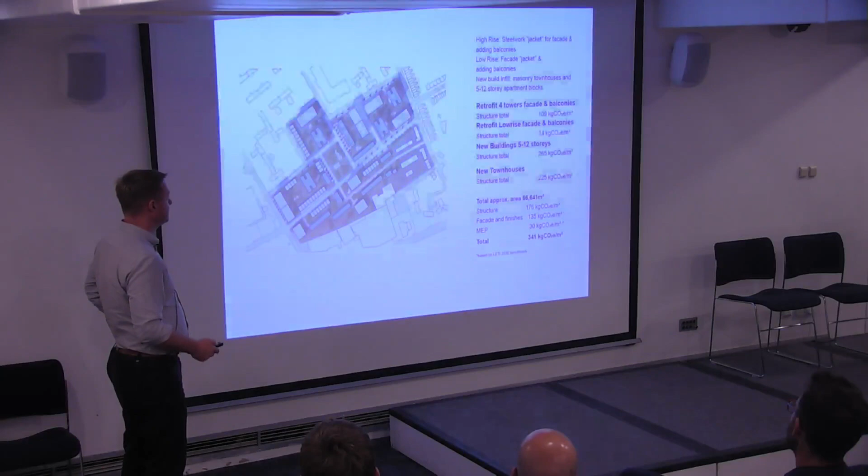And here's again, for the option of 800 homes, the key information is at the bottom right. Once over the entire area for that space, looking at retrofit plus new build proposals, you're around about 340 kgs, compared to potentially 500 to 600 from just straight new build. And remember, we're not getting rid of the original embodied carbon, because we still own that, and you start on a baseline which already has a lot of embodied carbon.

So this is just a very high-level axo showing the different aspects, really taking on a landscape-led approach. So assess all the buildings, but also ask how does this actually become a really good place? That's the first thing to do - if it can't deliver a really good place, is it really worth it? So trying to prove two points here, hence calling it a retrofit neighbourhood rather than just a building.

All the lessons learned from the Gascoigne estate really involve improving street legibility, green-blue strategies, programme landscape and new parks. In this case, we then looked at densifying the linear blocks and the refurbishment of the towers.

On other phases, we found it really successful to work with townhouses in combination with taller blocks to frame courtyards. This is also toward the very south part, which already has some low-rise - it could also relate to three-storey houses or apartment blocks.

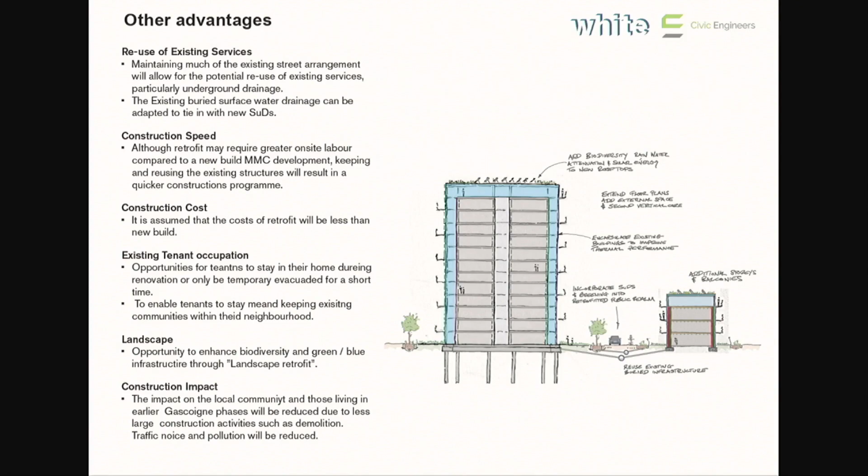So I think we're on our penultimate slide. Here are some of the potential advantages of adopting this approach. Reuse of existing services - maintaining much of the existing street arrangement will allow for the potential reuse of existing services, particularly underground drainage and existing buried services.

Water drainage can be adapted to tie in with new hardwired green infrastructure and SUDs, which I think is very important when looking at the retrofit of any scheme. Getting the green infrastructure in both at street level and at high level on buildings is really important to help manage and control surface water and flood risk.

Construction speed - although retrofit may require greater on-site labour compared to a new build MMC development, keeping and reusing existing structure will hopefully result in a quicker construction programme. It might also give the opportunity to allow for tenant moves across the estate a little bit easier compared with complete demolition. If you can do one tower at a time, you can potentially think about how you locate tenants and move them through. That's actually quite an interesting thing.

On the first few phases on the Gascoigne estate, very few asked for the right to return. But now that more phases have been delivered, especially after West Phase 1, which was one of the first to be handed over, more and more are actually asking for the right to return once the new development comes back.

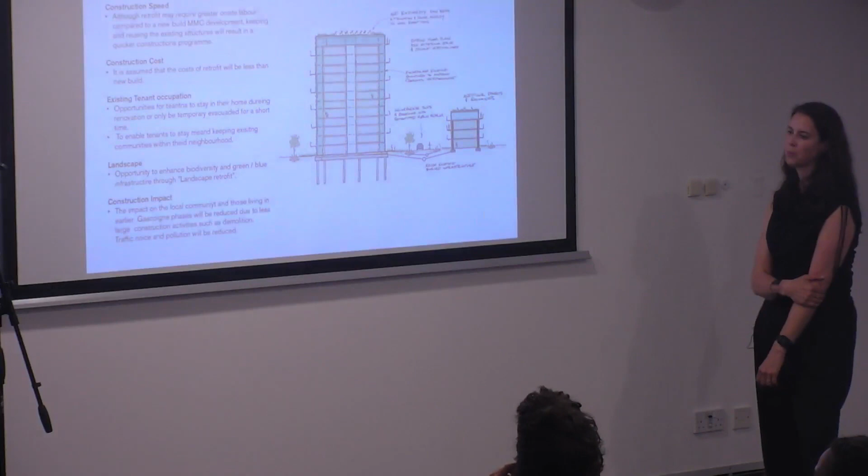Construction costs - we didn't have a QS in our team, so if any QS is in the audience, we might want to get you involved with this. But we've assumed that the cost of retrofit will be less than new build. The market isn't as mature though, it's not the status quo for a residential approach. There's going to be implications in terms of how you build these things because it's going to be slightly unique, so cost is a really interesting one to help explore.

Existing tenant occupation - I touched on that a little bit too early. So there are opportunities for tenants to stay in their home during renovation, or potentially move between retrofitted towers.

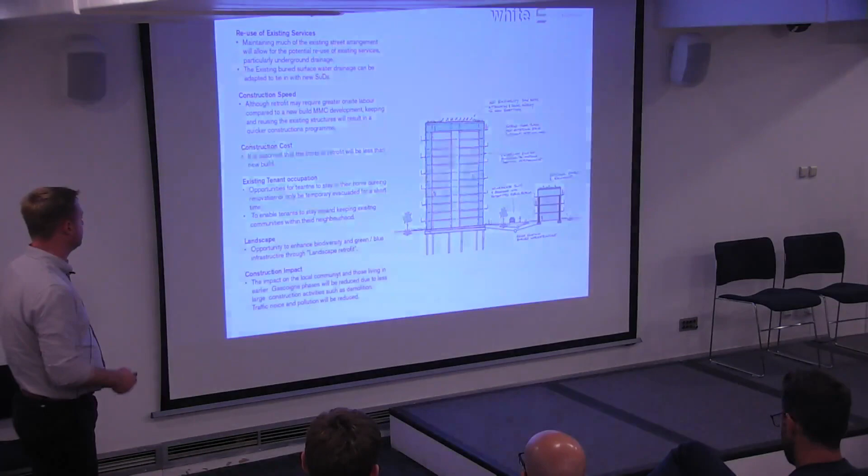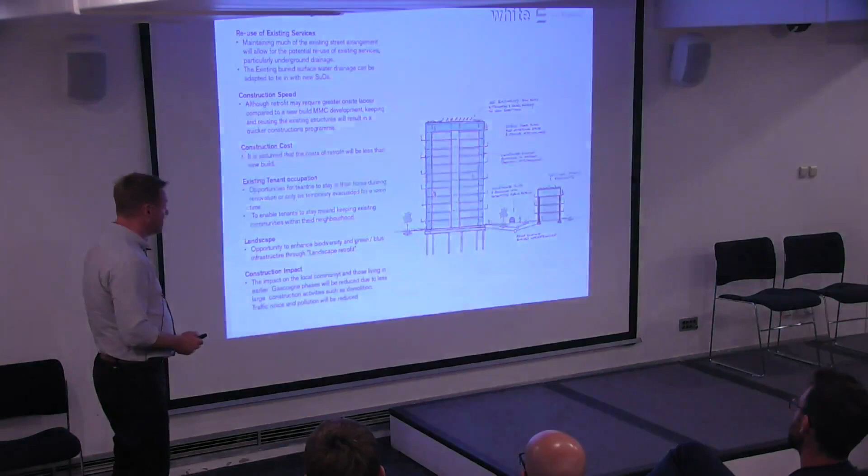Landscape - there's opportunity to enhance biodiversity and green-blue infrastructure through the landscape retrofit. And the last thing, which I think is a really key point, is that when you knock down a lot of buildings, that's a lot of intervention, mess and noise for a local neighbourhood, especially one most of which has currently been rebuilt. So the impact of doing a retrofit approach should result in less disruption on the neighbours compared to a full demolition scheme.

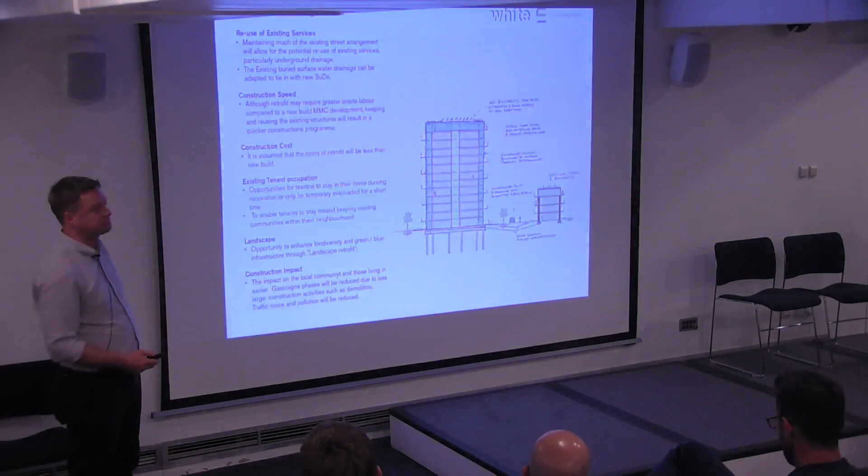Yeah, these are just a few images from when we did the placemaking strategy. I think, like everyone else today, it's all about these people - this is their home, this is where they want to go around doing their lives, and they've got children in all these schools. They don't want to be scattered across the borough and might not move back because they want to keep their friends and families where they are. So that was kind of our provocation, I guess.

I know we've got lots of architects in the audience, but it'd be interesting to hear from whoever has a question. If you do have a question and you want a specific person to answer it, please say so. If you're up for anybody answering, we'll open it to see who wants to take it. So anybody got a question to get us started? Oh, one here.